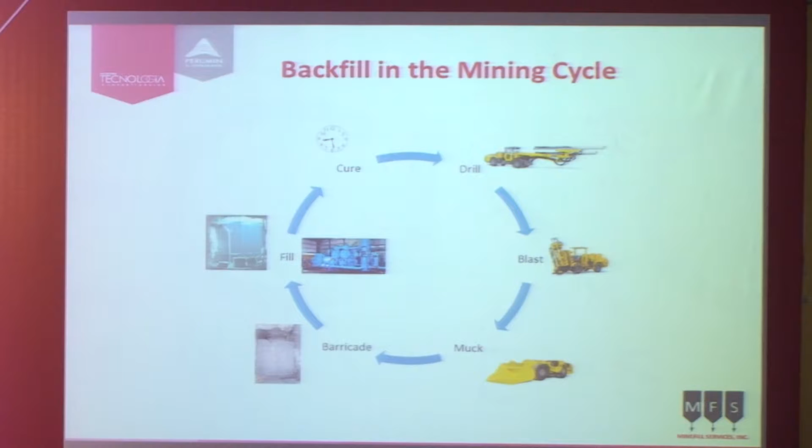So we talk about backfill in terms of the mining cycle. Everybody's familiar with the mining cycle where we drill, we blast, we muck out the material, and then we put some sort of fill in there in order to complete the cycle and allow us to go in for the next round of drilling.

Now in that cycle there's not a lot of flexibility with time, because the drilling, blasting and mucking is an operation that takes a period of time that doesn't have a lot of flexibility in terms of saving time. But when it comes to the backfill, it typically involves a period of rest while we wait for the backfill to cure, while you're waiting for the cement to cure. That cycle can take anywhere from a few days to a few weeks.

And at that stage, the mine is basically unproductive in terms of that stope - you have to go mine other stopes. So if there was a way of speeding up the fill cycle, it would allow the mine to increase its productivity and increase the throughput. I think that's one of the big advantages we see with this transition from hydraulic fills to paste fills - being able to shorten up the cycle time because we don't require the curing times with paste fills, and this leads to higher productivities in the mine.

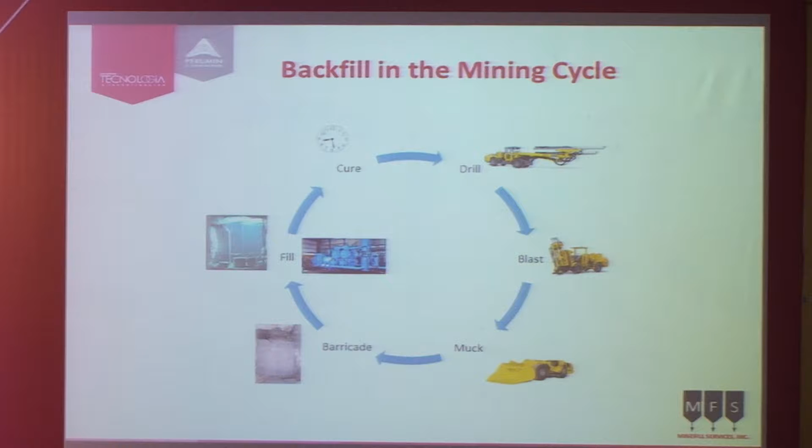So in terms of the backfill in use today, obviously here in Peru you're still dominantly based on hydraulic fills. There are a lot of very large hydraulic fill operations here in Peru - you can see my pictures there from the Centromin days up at Cobriza and Cerro de Pasco.

And slowly the industry is converting hydraulic fill operations into paste fills. Here in Peru you have about a dozen paste fill operations. But there's still a lot of mines that rely on rock fills, and the reason is because rock fill is able to achieve strengths that no other type of fill can achieve.

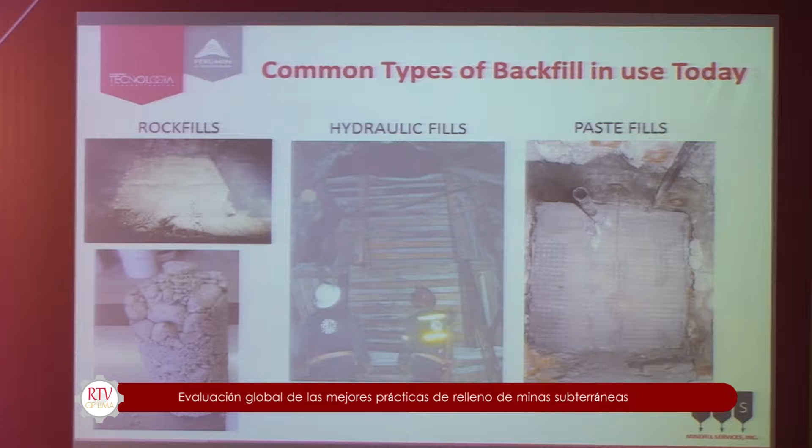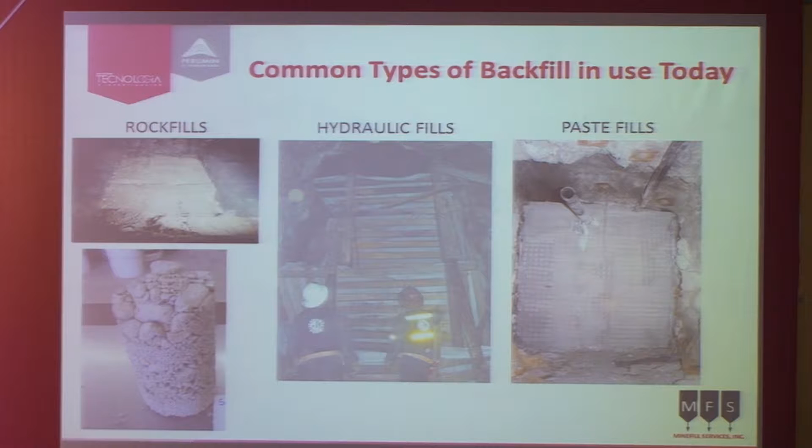So when you have a very high stress situation, particularly if you're doing mining undercuts, or if you're in very high stress ground, we still see a lot of operations that rely on rock fills. But the cemented rock fill worldwide is really a dying business, because there's probably been more cemented rock fill operations that have converted over to paste than there has been with hydraulic fill operations.

So if we look at the uses of backfill in terms of the industry drivers - in its simplest form, we use backfill just to fill the voids. Basically, we're returning mine waste underground, and in a lot of cases this is a complementary part of the mining cycle because we're providing a working floor in order to do the next lift of mining.

Obviously, the benefits to using the backfill as a void filler are benefits that you would easily see improve - being able to reduce the surface disturbance and returning more of the materials underground, having lower water treatment costs for treating water from tailings basins and the like, easier project permitting, which in a lot of jurisdictions now is really becoming quite an important factor, and of course reducing the closure costs and the liabilities long term at the end of the mine operation.

There are quite a few operations that look at doing a sulfide separation at the end of the flotation in order to selectively place high sulfur tailings underground and put the lower sulfide tailings on the surface, again in order to deal with the environmental impacts.

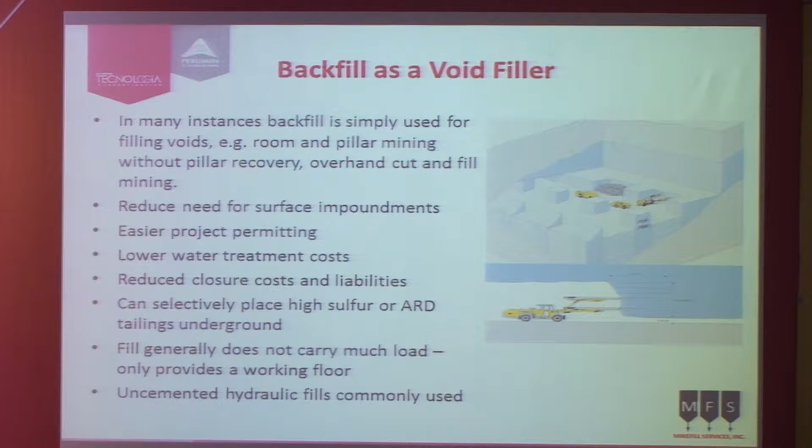But the real benefit of backfill, of course, comes from being able to use it for increasing the ore recovery. Basically, the backfill allows us to mine ore bodies that wouldn't be economically mineable otherwise, and we're able to get much higher extraction ratios, sending a lot more of the material to the mill by providing ground support during the mining.

Typically this is done in a kind of a primary secondary stoping sequence where you have large open stopes, long hole stopes, or a sub-level. In this case we have to add cement because the material is not self-supporting without cement. So cement consumption becomes an issue then.

In the secondary stopes, in a lot of cases you can get away with putting in uncemented fill, and in fact it's quite popular to put uncemented rock fill in secondaries, but cemented tailings in the primaries. But generally, unless we're a very large mine, we're looking at fairly moderate strength, something in the order of about a half an MPa compressive strength.

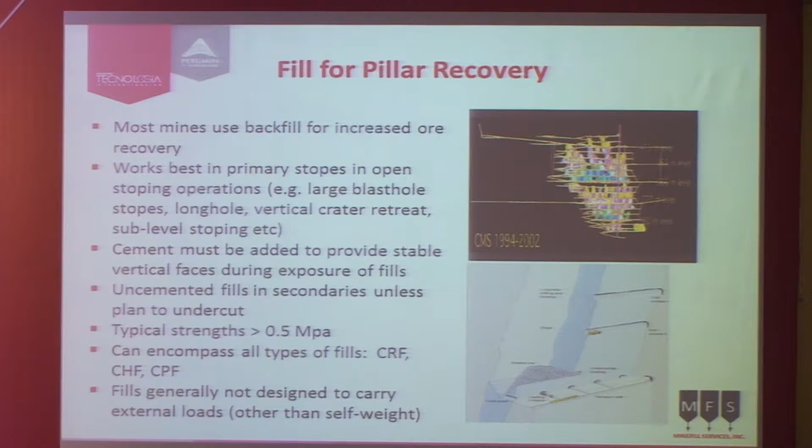This type of method, of course, is suitable for any type of fill, whether it be a rock fill, a hydraulic fill, or a paste fill. Because these fills are generally not designed to carry a load other than providing pillar support and being self-supporting. So if you're in a situation where you have a hanging wall putting a load on the backfill, that really goes to the next level of fills, which I'm going to talk about here - mining in a high stress ground where you have stress transfer to the backfill.

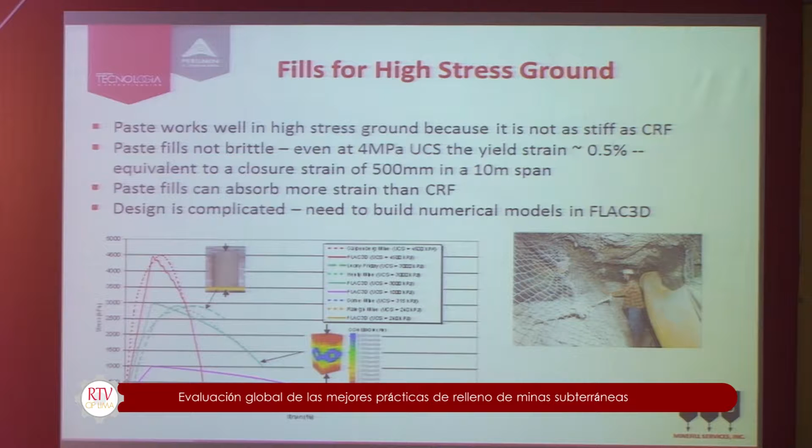In the case of high stress ground, traditionally mines have used cemented rock fill because it gives you a very stiff backfill at fairly reasonable cement contents, something in the order of 5% cement. But with the advent of paste fills, a lot of mines are finding that the paste actually provides more benefit than the rock fill. And that's because of the yield strains that are imposed in the fill.

The chart at the bottom gives you an excellent example, going from about a 250 kPa paste fill, where you have a very high yield to strain to failure, well over 3% strain. As you progressively add more cement, you increase the peak - you see the peaks rising with the different colors until you get up to the red where you have a 4 MPa fill. Now you have a very stiff paste fill, and you're looking at about a 0.5% yield strain to failure, but at a much higher compressive strength. So it's the ability of the paste fills to absorb these strains that makes it very suitable for use in high stress ground.

But I will caution you, the design process is very complicated. It's not something that you can do on the back of an envelope or in an Excel chart. It really needs proper numerical modeling.

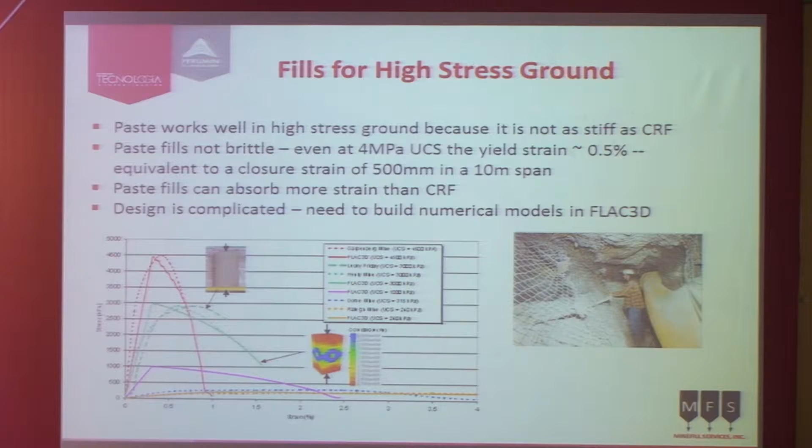So if I jump backwards here in terms of the history of backfilling - in Mexico, for example, we see lots of mines that show evidence of mine backfills that go back to the days of the Spanish conquest. And I'm sure you probably have mines here in Peru that have 100 years of operating history with backfills. In those days, of course, they didn't understand the science behind it. The only reason they did it was to allow them to provide a working floor in order to access the ore.

But in the 1950s, we started to see hydraulic fills becoming more and more common because of the comminution techniques that generated coarse tailings, and those coarse tailings could then be slurried and returned back into the mine as a slurry, which was very inexpensive.

With the introduction of Portland cement in the 1960s, we were able to start using cemented hydraulic fills, which allowed the recovery of pillars, as we just seen. However, the introduction of these cemented hydraulic fills did not come without problems, one of the biggest being the very high cost of the cement, because the cement consumption was high. Anyone who has worked with backfills knows that your cement cost can easily be 70% of the operating cost of your backfill.

The other problem, of course, is that when you're pumping a hydraulic fill, you end up with massive volumes of decant water, which is generally very dirty. It carries a lot of the slimes out with the decant water. And if you're in a region like South Africa, where mines are kilometers deep, pumping all that water down into the mine is a major cost, because they've got to get all that water back out again.

Then to make it worse, the metallurgists started playing with the grinds, making them finer and finer for the flotation circuits. So we find that we get less and less sand, and we're in a position where we have to accept more and more slimes in the hydraulic fill.

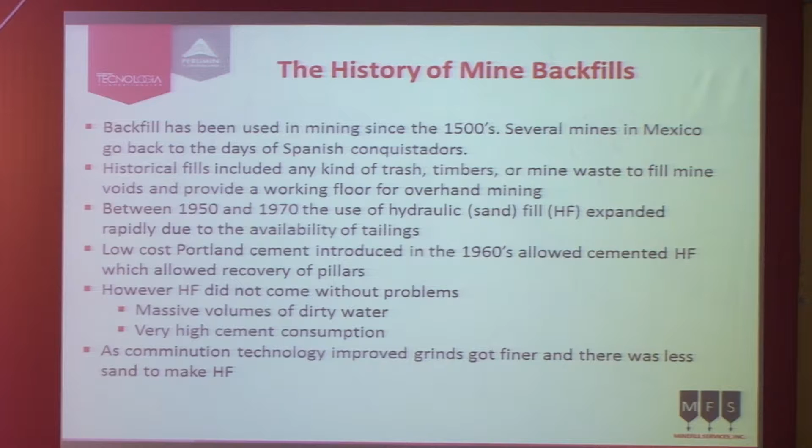So this really was the impetus for doing the research into the early days of paste backfills. It really was in Canada, through INCO, and in South Africa, where most of that effort was expended, and they were looking for ways to reduce the water that was being pumped down into the mine. That was the main focus back in those days.

One of the early solutions that came out was this so-called tail spinner, which is basically a centrifuge. The tail spinner basically produces a filter cake, and that filter cake was at a solid content that it could be pumped, or it could be pneumatically stowed in a stope, and you didn't have all that return water coming out then.

In 1978, the first tail spinner was granted a patent, and it was put into use in the Wits Basin in South Africa. Ironically, the first paste systems in Canada were actually based on the tail spinner technology, going all the way back to about 1983 at the Dome mine and at South Porcupine in Canada, where they had what we would call the very early beginnings of a paste system.

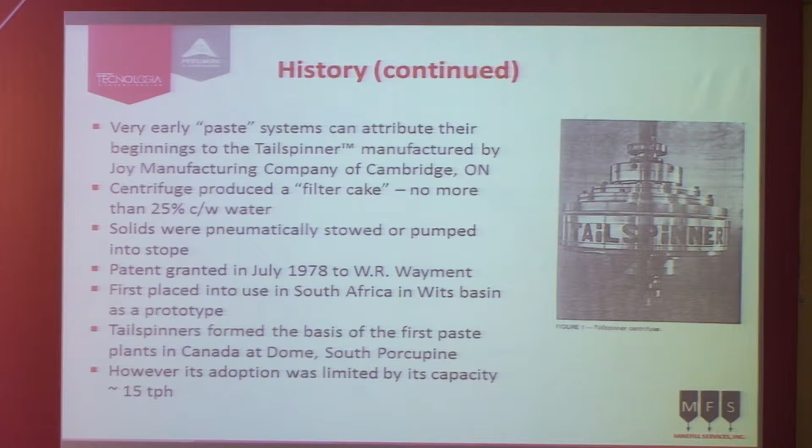The big limitation with this system, of course, was the throughput. You could only get 15 tons an hour out of this piece of equipment, so it didn't lend itself very well to the types of mines that we do today.

So with that work, we saw the beginnings of paste backfill in the early 1980s. And back in those days, I don't even think the word rheology was even known. Certainly people didn't understand the rheology, or appreciate how rheology impacted the behavior of these materials.

It wasn't until the late 1980s when a South African by the name of Verkerk actually started doing rheology experiments on thickened tailings, looking at transport of thickened tailings. He produced the first rheograms for thickened tailings and what we would call paste, and he was the first to publish a paper showing that these materials act as a non-Newtonian fluid, and that their properties are governed by the yield stresses and by the viscosity.

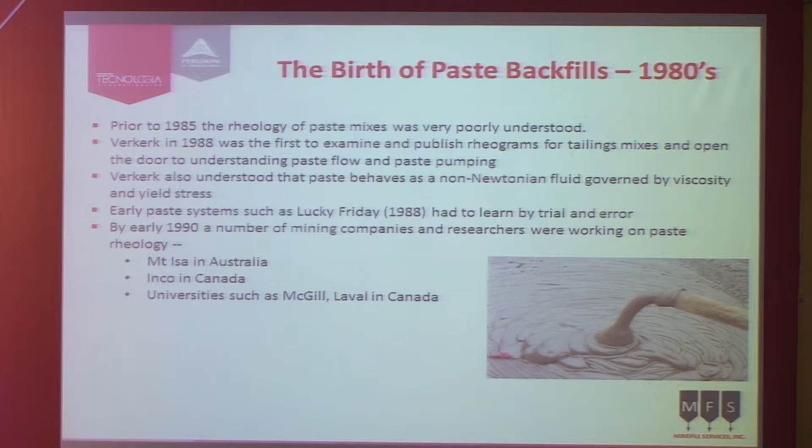That work was going on in South Africa, and at the same time we had some early paste systems going in the US, Lucky Friday, for example. But those systems were basically based on trial and error. There was no science involved, and they made a lot of mistakes and there were a lot of failures. So it wasn't until about the early 1990s that the mining companies got involved and started spending money on researching the properties of paste.

So what came out of that was that we began to realize that there was a science behind the rheology of paste.

If I start with the very basic definition, because it's amazing how many people don't understand the difference between a slurry, a thickened tailings, and a paste: the way we backfill engineers define it is that a slurry is a suspension of solids. Thickened tailings is equivalent to taking that suspension, pouring it into a beaker and letting all the solids settle, then draining the water off, and that material left in the bottom of the beaker would be called a thickened tailings.

But when you go to paste, you're actually doing some sort of mechanical action in order to remove more water, and at this point you start to get point-to-point contact between the particles in the paste, and that's why it behaves differently than a thickened tailings.

Everybody knows the industry definition of paste as being a non-segregating, non-settling material, and that definition still holds, but those of us in the backfill business would prefer that people understand the science, because our definitions are all based on science now as opposed to the industry rules of thumb.

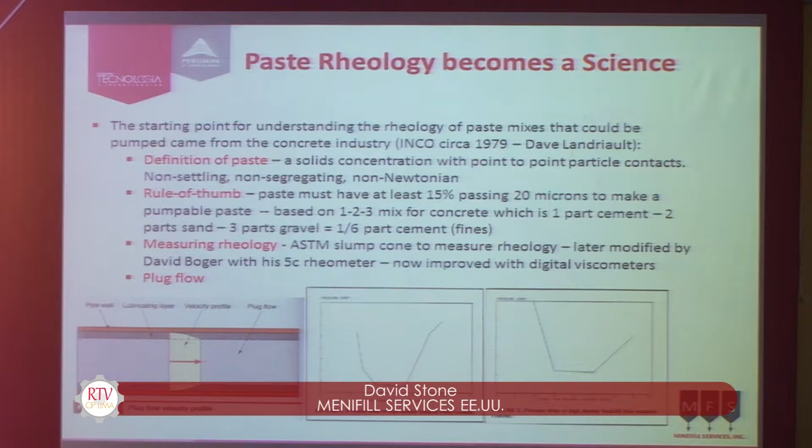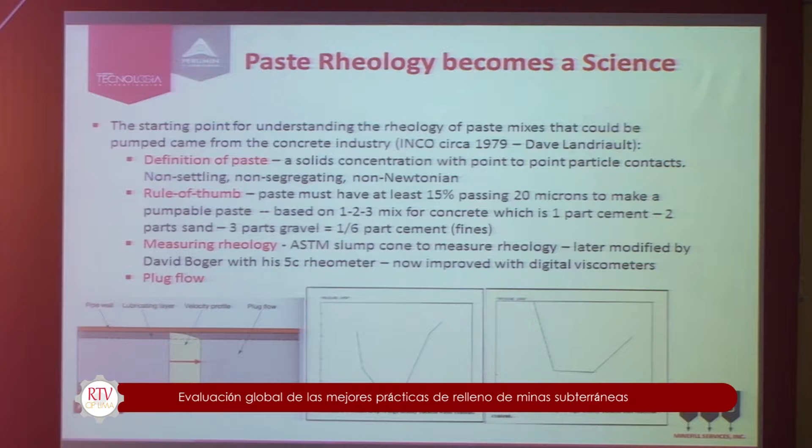What they realized is that when you pump paste, you get this plug flow phenomena, where you have shearing on the walls and the material in the core of the pipe acts as a plug. That plug flow resistance is driven by the fines in the paste, and it's driven by the water content, basically the yield stress in the paste.

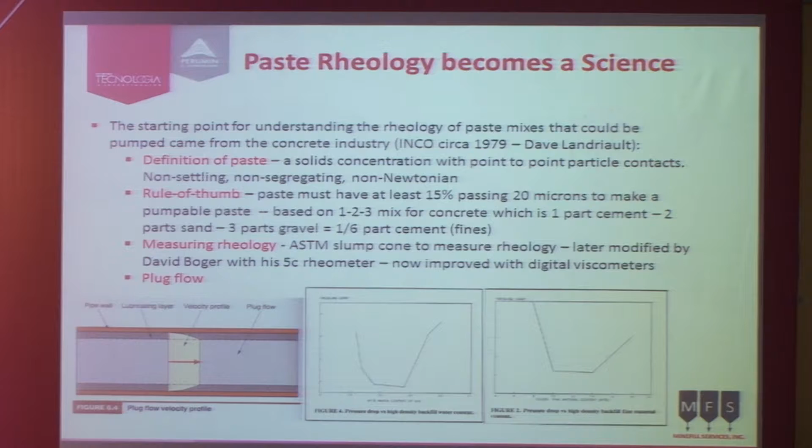The entire paste business is summarized on that one slide right there. So what we're showing here is the definitions, with percent solids along the x-axis and yield stress along the y-axis. This is a typical paste rheogram.

Here we transition from a slurry to a thickened tailings to a paste and then eventually to a filter cake. The transition from slurry to thickened tailings takes place at about a 20 Pascal yield stress, and the transition from thickened slurry to paste takes place at about a 100 Pascal yield stress, and then by the time you get up to about 800 Pascal yield stress, now you're talking about filter cake.

Now these are not solid black lines, they're very thick gray lines. Depending on the material and the mineralogy and chemistry of your tailings, these points move around.

But what this slide also shows you is the various methods of producing these materials. So you go from a segregating to a non-segregating material using unthickened, moving into a conventional thickener, moving into a high-density thickener, and what we would call a paste thickener.

In terms of the thickening continuum, what the curve shows is that as you go up the curve, you have increasing residence time in the thickener, and that means the thickener has to have an increasing volume.

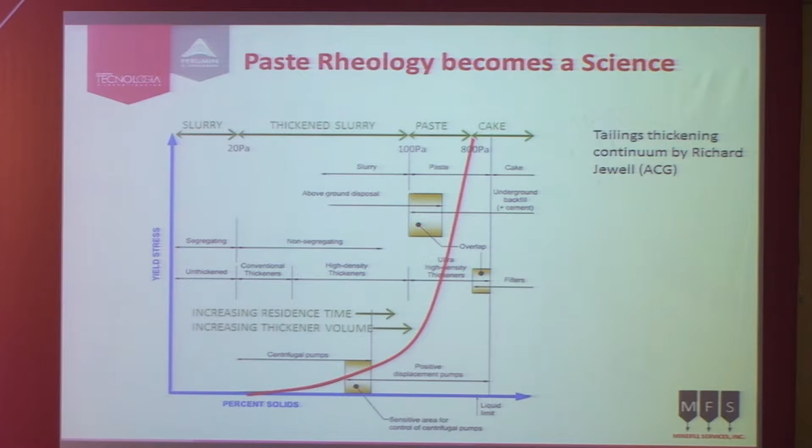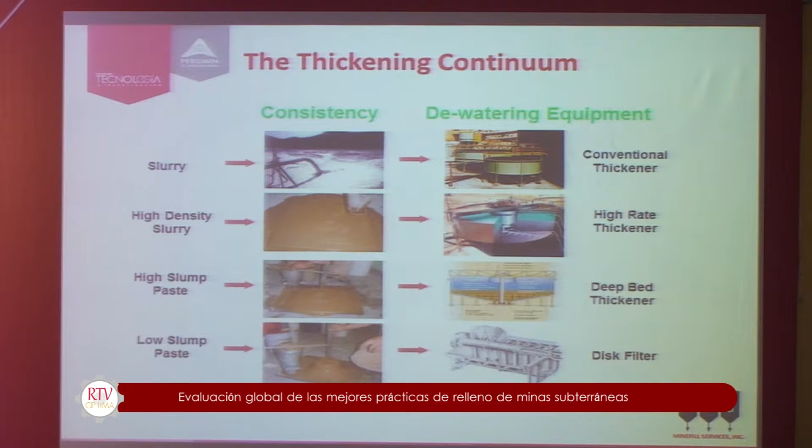So just from a visual aspect, that thickening continuum goes from the slurry, which is just based on conventional thickening, and it might be at 40 to 50% solids. You get into the high density slurry, where now you're looking at something in the order of 60 to 65% slurry solids using a high rate thickener.

Then you get into what we call the high slump paste, where now you have to start looking at a larger thickener, typically nowadays a deep cone or a deep bed. Now you're looking at something north of 70% solids, and then you get up into the low slump paste, something in the order of a 7-inch slump paste. Now you have to go to filtration to get the solids content, because you can't produce the material from a thickener, since you're talking about solids contents in excess of 75%.

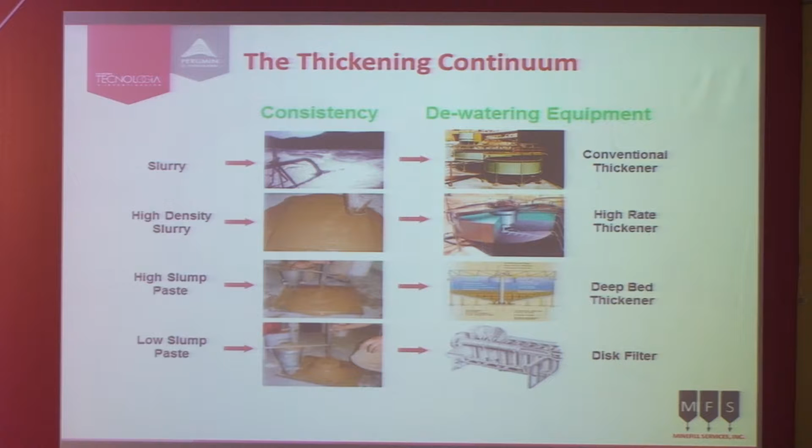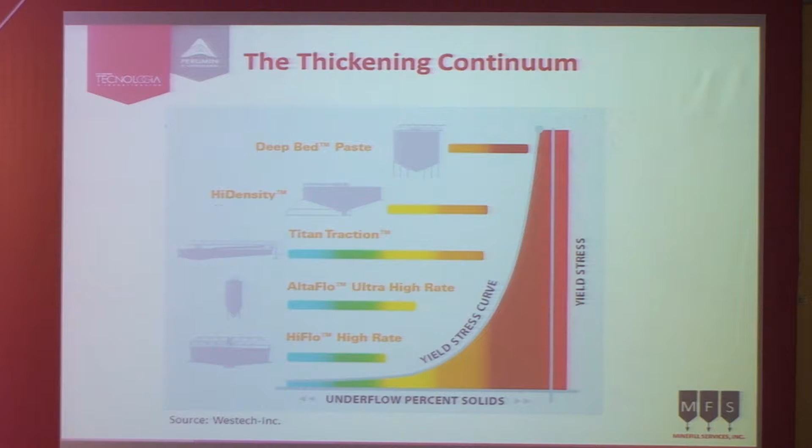This slide, I apologize, is a commercial slide produced by Westech, just showing their particular line of thickeners, but I wanted to show you how, as you go up that yield stress curve, it drives the decision as to what kind of thickener you're going to use. At the low end, you're using a conventional thickener, and to produce the very high solids content, very high yield stress materials, you're going to have to look at a deep cone or a deep bed thickener.

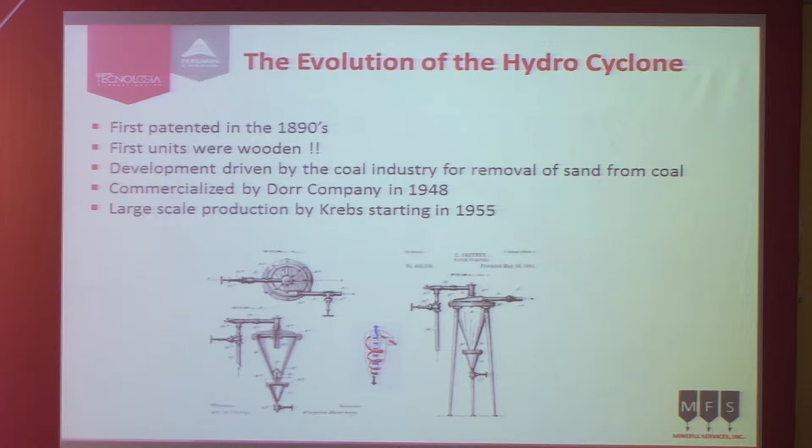I just want to spend a few minutes looking at all the different types of equipment that would be in a backfill plant, and show you how the industry has put pressure on manufacturers to deliver products more suited to what the backfill business needs.

One of the most fundamental pieces of equipment is the hydrocyclone, which even in your hydraulic fill plants would see wide use. This equipment's been around for well over 100 years, 125 years. First patented in the late 1800s, they were built out of wood, and served the coal industry by taking contaminants out of the coal.

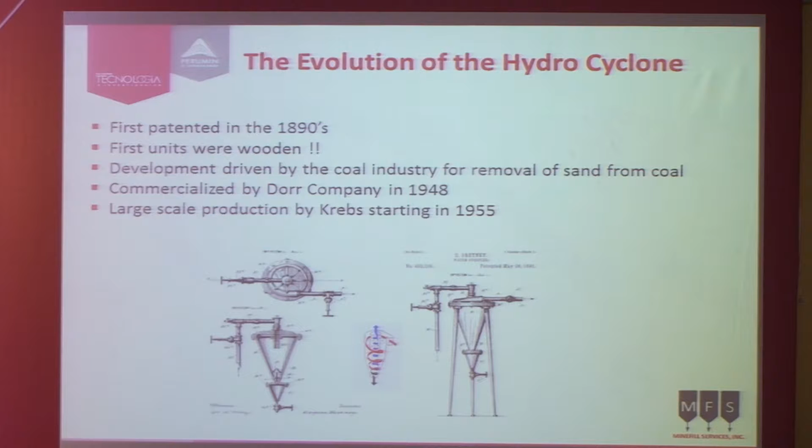In the late 1940s, early 1950s, these units were commercialized for metal mining and dealing with metal tailings by the Dorr Company. Then in 1955, Krebs was formed, and Krebs is still today one of the larger manufacturers of hydrocyclones. But the basic concept behind the operation of a hydrocyclone hasn't changed at all. What's changed is the materials they're built out of, and the control technology to control the stream of material that reports to the underflow and overflow. But the actual concept is virtually the same.

The thickener plays a very important role in the business. These units are over 100 years old, dating back to the early 1900s, where the first designs used rakes in a circular tank. Then in the 1990s, Alcoa started looking at treating bauxite residues for alumina plants.

They produced paste thickeners, or at least thickeners that could produce a paste for bauxite residues, because this material is extremely hard to dewater. In the late 1990s, it was realized that technology was very well adaptable to the mineral industry, and we started seeing metal mines getting into it. The technology was licensed to Alcan, who sold those thickeners through the EIMCO company to non-alumina industries.

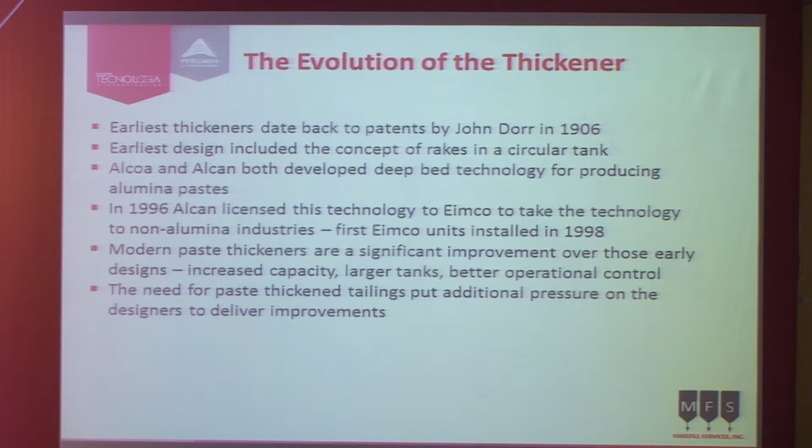The first units went in in 1998. Even today, modern paste thickeners still rely on that same technology, although there's been a lot of evolution in those thickeners, which I'll talk about in a few minutes. Really, the paste industry put a lot of pressure on manufacturers to come up with improvements.

What we see now is that newer thickeners have much better rake designs and can handle much higher torques. There's been a lot of engineering that's gone into the shape of the beds, looking at the angles of the beds and the volume in the bed.

One of the big improvements has been putting in the dewatering pickets, because the problem with paste is you pour the material in the top, and you're supposed to squeeze the water out so you get the thickened product out the bottom. But that flow path to get the water out is very long. By putting in these dewatering pickets, they shorten the flow path, which speeds up the thickening process.

There's been a lot of work done on flocculant chemistry, and today there are well over 300 of these deep cone units in operation, both for surface paste disposal and underground paste disposal, at over 100 mine sites. For a lot of mines, the core of the plant is a deep cone thickener.

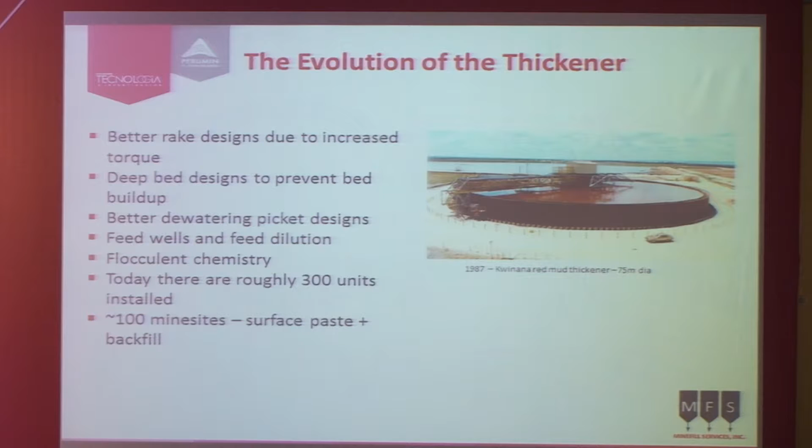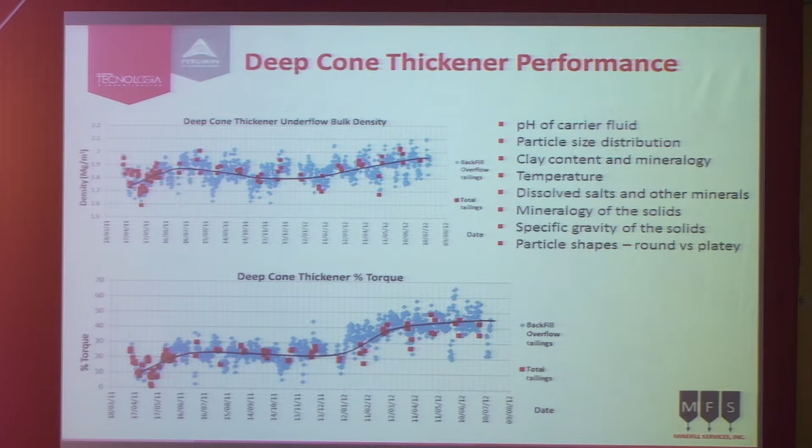The reason you get this is because of changes in the mineralogy of the material going in, changes in the particle size, changes in the clay content. If you have any dissolved salts or other dissolved minerals, it can have a huge influence on the thickening process. And as you're moving through the mine, you're changing sulfide content, oxidation, all kinds of changes in the ore mineralogy over time that will produce this cyclical behavior.

In the bottom slide, you see a change in the ore. You see it's cycling up and down, and then all of a sudden you get into a material that maybe had more sulfides in it with higher SG material, and all of a sudden the torque on the rake increases dramatically in a very short period of time. You'll see this process going on over time.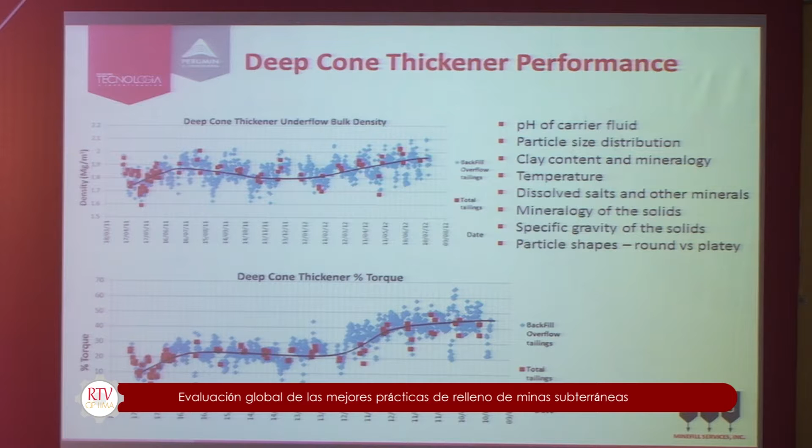So for the backfill business, we don't like this, because we tend to have very tight operating parameters that we use for the paste per mine backfills. We want to control the percent solids to within about 0.5%, so we don't like these fluctuations.

So most paste plants for underground disposal would still have a filter cake component that gets added into it in order to level this out, in order to kind of mask that behavior.

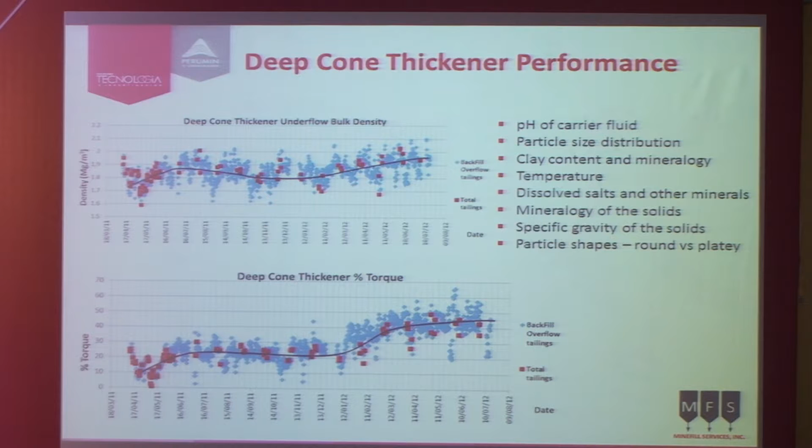But still, you can thicken the tailings cheaply and quickly by doing a pre-treat with the deep cone. Of course, the other thing that happens with a deep cone that a lot of people don't appreciate is that after the material comes out the underflow, it then goes through a pump, and you get a pretty significant shear thinning when it goes through that pump.

So you can see the blue dots are the yield stress of the paste before it went into the pump, and the red dots are the yield stress of the material after it goes through the pump. This is real live data. It goes from something in the order of 120 Pascal yield stress before the pump down to about 40 to 60 Pascal. So it's halving the yield stress by going through that pump because of the shear thinning.

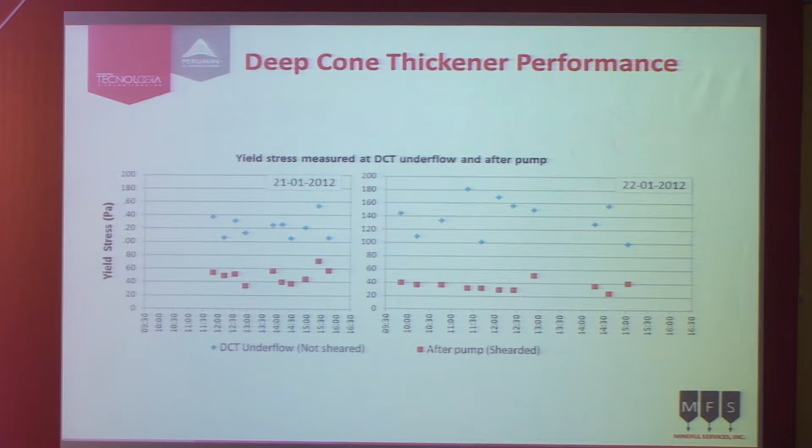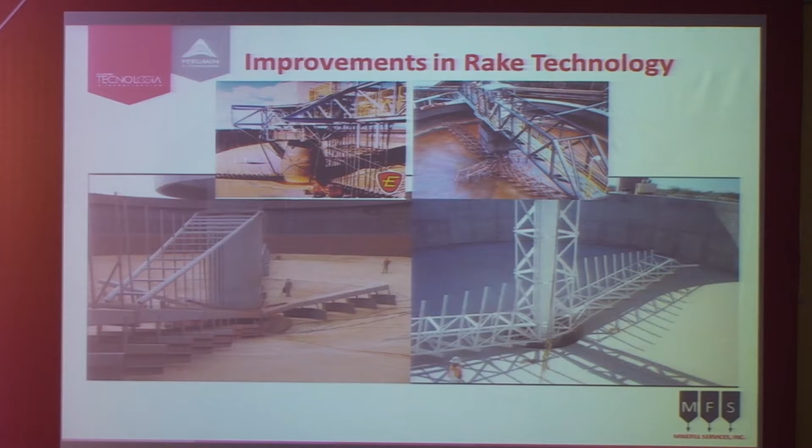So the last aspect of the plant then, of course, is the filtration. And again, not surprising, the filtration technology has been around for a very long time, well over 100 years. And as with the hydrocyclone, there really hasn't been any significant technology improvements in the filtration for tailings.

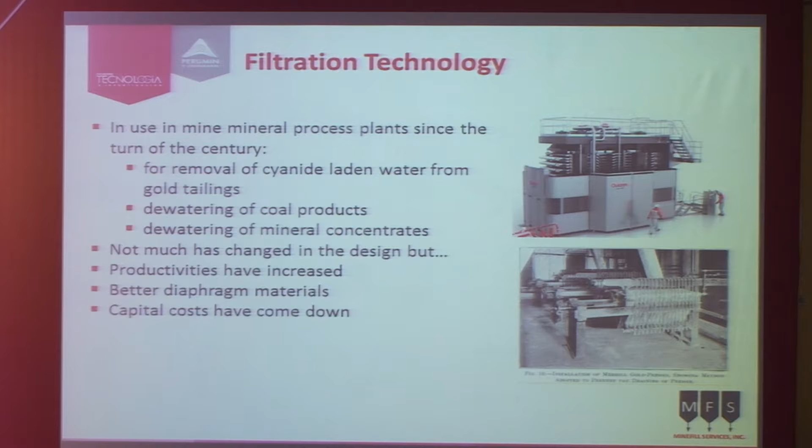But what has changed is the cost. What used to be - I can remember when I first started out in this business - a Larox filter press was something in the order of $2.5 million, and it cost 75 cents a ton to operate. Nowadays, these units sell for a fraction of that value, and they operate at much higher efficiencies, so they produce thickened, filtered tailings at a much lower cost. So all of that is good for the industry.

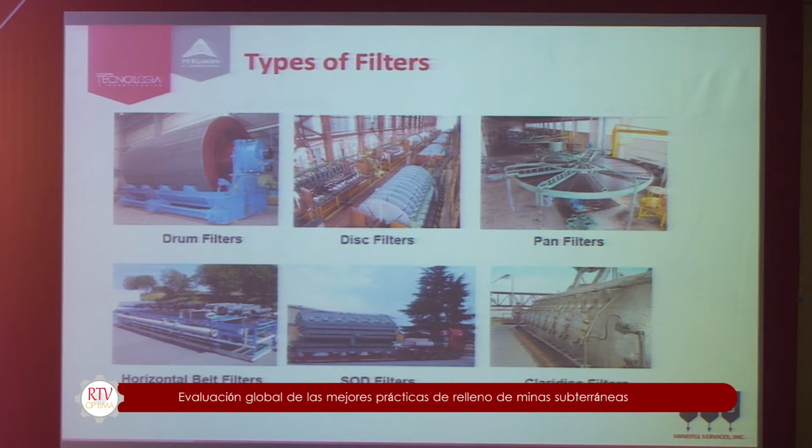So there's a number of different varieties of filters available for thickening tailings. The ones we generally rely on - probably 90% of paste plants would have disc filters, and the remainder would have horizontal belt filters. The horizontal belt filters do have an advantage in that you have a longer retention time, and you can produce a thicker cake, and they have a much higher throughput, requiring less maintenance than the disc filters.

But for some reason the reason people like disc filters is because they're compact. They take up a lot less space in the plant, whereas a belt filter takes up an immense amount of space and makes for a very large plant.

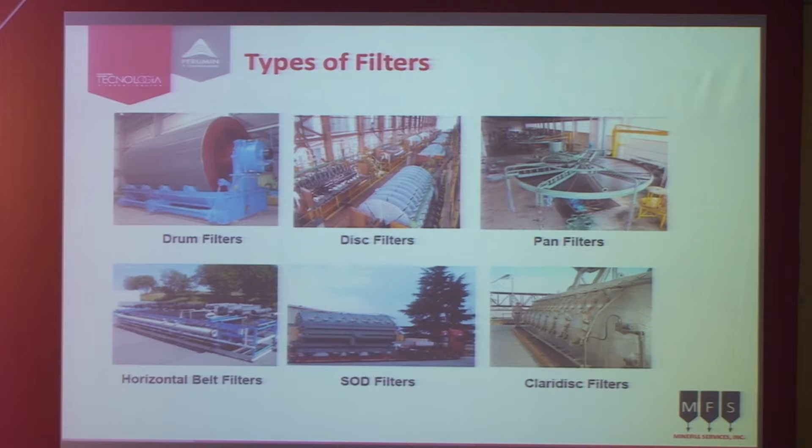So once we've made our paste, now we've got to get it into the mine. I talked earlier about the work that Verkerk was doing in South Africa, trying to assimilate pumping of paste to the pumping of concrete, for example. Now, concrete's got aggregate in it, so it's not surprising that some of the very early paste systems had aggregate in them. Actually here in Peru, at Andaychagua, you have kind of an aggregate-based paste system, and people were adding the aggregate because they were essentially trying to make concrete.

And Verkerk was one of the first to notice the conundrum that if you add aggregate to thickened tailings to make a paste, it actually lowers the resistance in the pipeline. So in these very early systems, a lot of them added the aggregate in order to lower the pressures in the pipeline because they weren't capable of pumping it otherwise. Even the Lucky Friday, the early startup of the Lucky Friday system in the US had aggregate in it. The very early Boliden systems in Sweden, at Garpenberg and the like, all had aggregate, and all the very early systems in South Africa had aggregate.

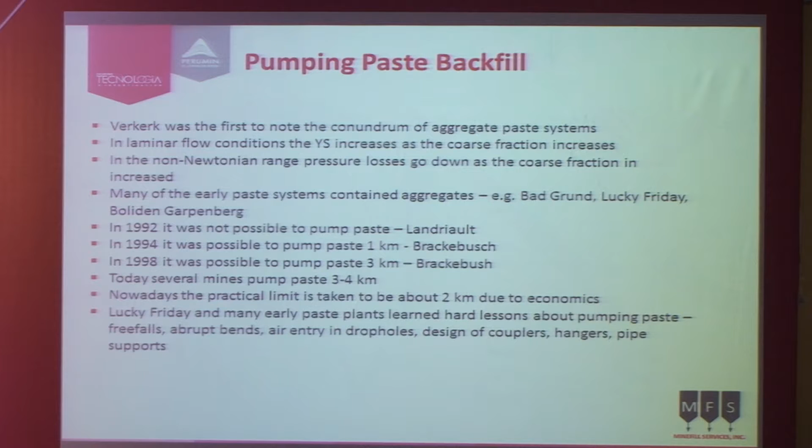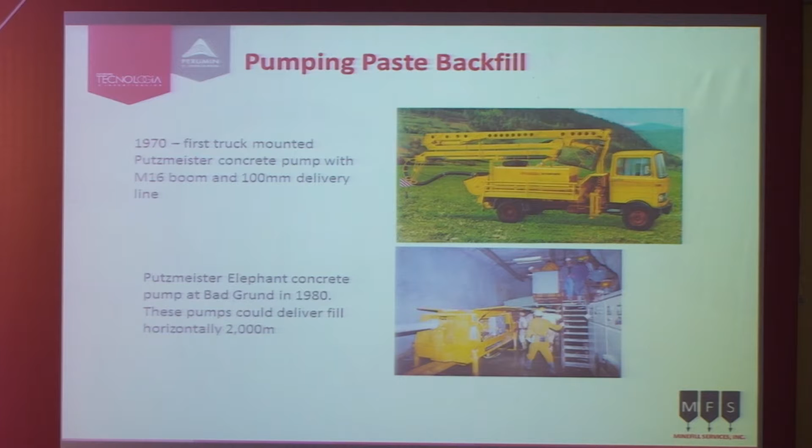So in 1970, there you see a Putzmeister concrete pump truck with a 100mm delivery line. Then by 1980, Putzmeister was supplying pumps to the Bad Grund mine in Germany, which a lot of people talk of as being the very first paste system installed in the world. Now, Bad Grund also had aggregate in their paste.

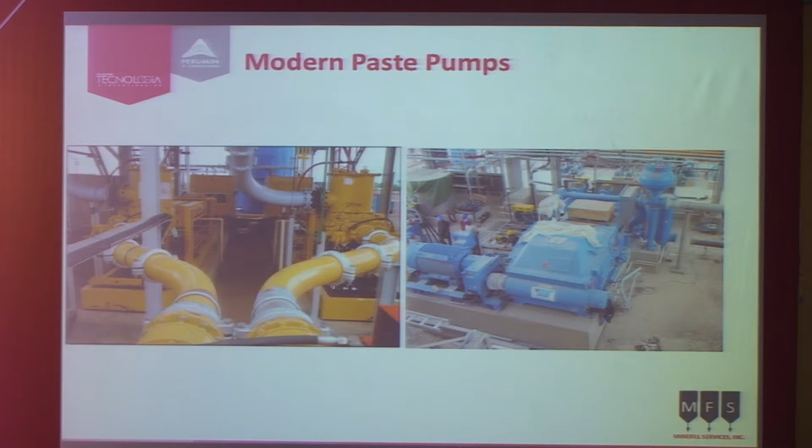And then on the right side you see a Wirth pump, which is a piston diaphragm pump. These pumps are massive - you can see the size of the people standing in the room. That pump would fill this whole room and plus more. They're monstrous pumps, but they will pump 1,000 cubic meters an hour and at pressures of 20 MPa.

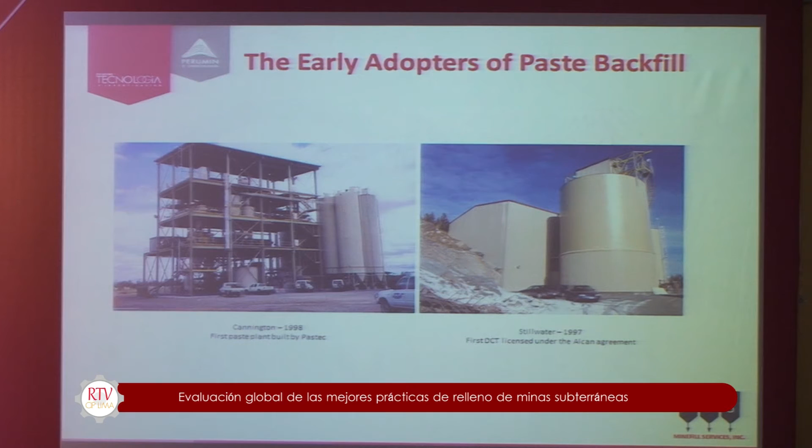So the early adopters of paste - the first Golder Pastec plant that went in was 1998 at Cannington in Australia, and ironically this was the second paste installation that went to Australia. The first one, done in the 1980s, didn't work, and that plant was a failure.

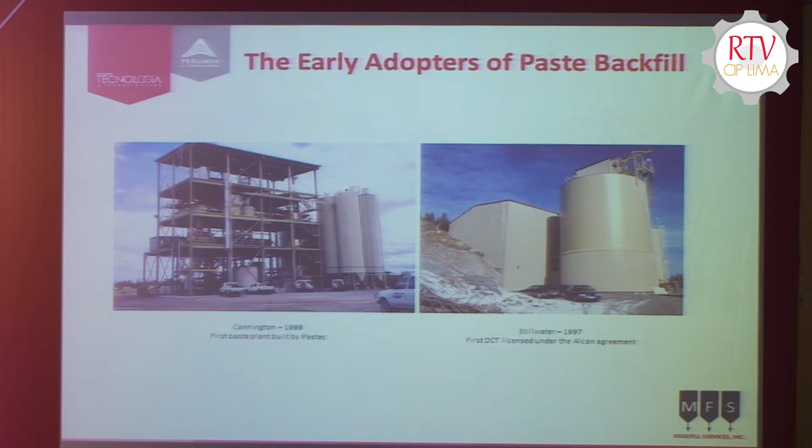You see there the 1997 Stillwater, which was the very first Alcan deep cone paste thickener that was installed under the Alcan licensing agreement in the US.

You can see the bauxite residue plants in Jamaica. Ewarton was the very first Alcan - the very first Alcan one that was put in, about 1996, I believe. And then you see Pajingo Gold in Australia in 2000, which is an Outotec design.

So all the big thickener manufacturers all make deep cone or deep bed thickeners, whichever you want to call them. They all have their own variety.

So as it stands now, we have about 150 paste plants operating worldwide. At least a dozen of those plants are here in Peru, and the industry adds about 5 new plants a year.

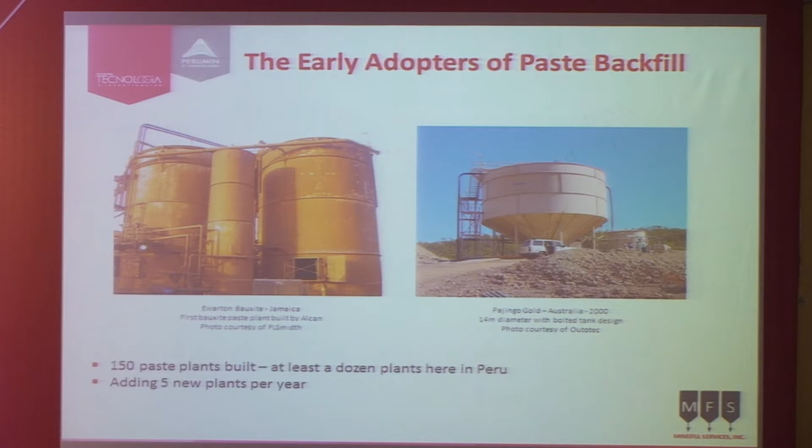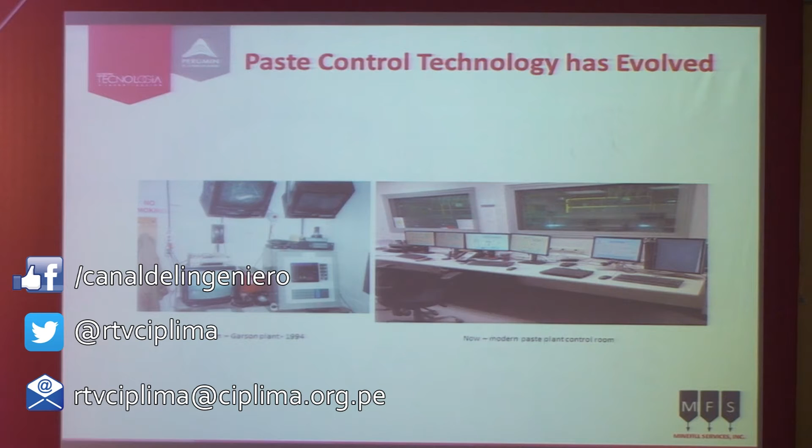So the operation of these plants, obviously the control technologies are a lot more sophisticated. You can see the Garson plant in 1994 on the left there, which was just a small, probably an amber monitor hooked up to an XT computer, and then a modern paste plant which has multiple screens and an HMI system. Everything is all regulated and controlled just like any normal metallurgical plant, a lot more sophisticated.

And of course all these plants now have fiber technology for being able to have cameras to have a live feed, so you can actually view the paste going into the stope.

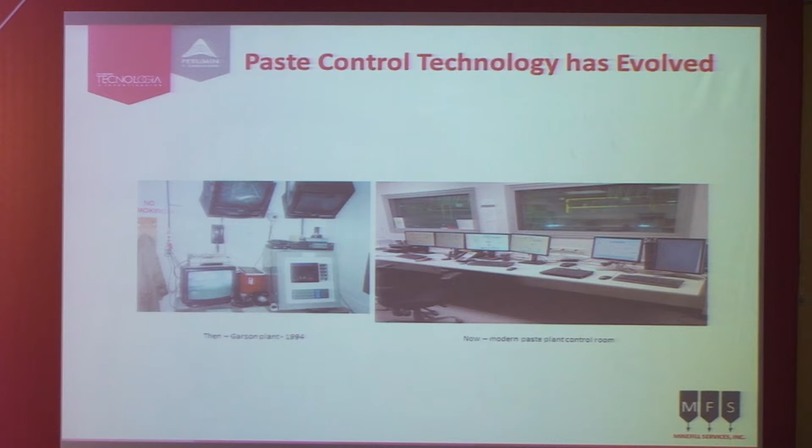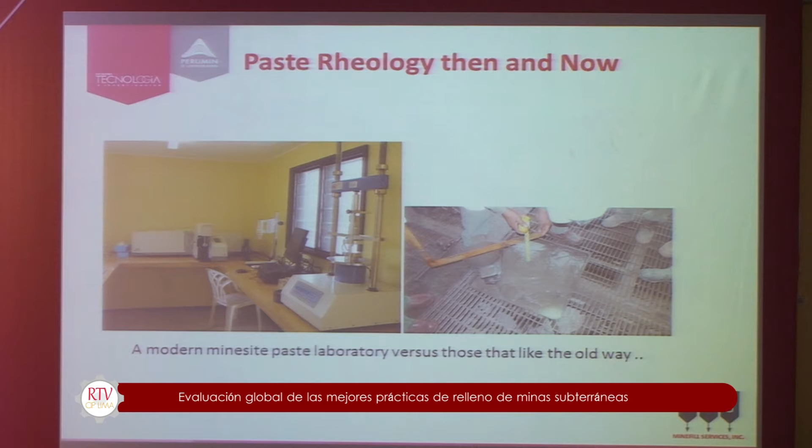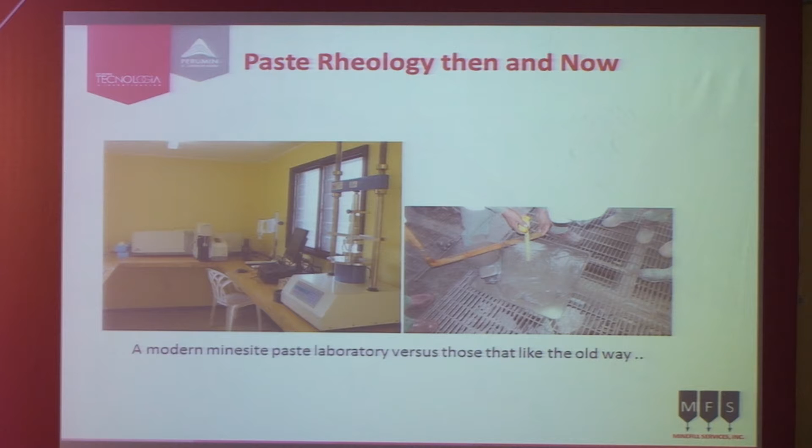Of course the actual quality control process has evolved over time. It's amazing how many mines still prefer to rely on the traditional ASTM slump cone, whereas other mines are adopting the rheometer. You can see the rheometer in the foreground on the left, and in the background you can see a laser particle sizer, used for routine quality control.

This slide was from a presentation I gave last year, showing how the paste business has been adopted over the years. You can see the two main symposia: the Minefill Symposium, an international conference held every three years, and the Paste Symposium, an annual conference. This coming year it will be in Santiago; last year it was in Australia. You can see how many papers are published referencing paste.

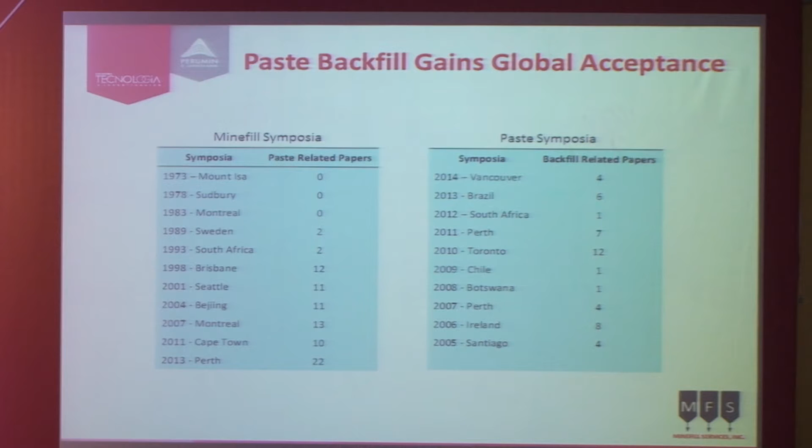Prior to 1989, in the Minefill Conference there was virtually no mention of paste. Then you can see how the number of paste papers has exploded over the years, up to 2013. The same is true for the Paste Symposia - as time goes on, we see more and more papers coming in. It's a measure of how the paste backfill business is being accepted as a global standard now.

So we've talked about the roles for backfill: using it as a void filler, providing a working floor for overhand mining, and very importantly, providing us with resource extraction by being able to recover pillars and recover broad disseminated ore bodies that might otherwise not be able to be recovered.

And of course the backfill business brings with it improvements in ground control, particularly in rock burst prone ground, by improving safety in the mine, and decreasing subsidence. Here in Peru, you get some very specific benefits in terms of being able to return mine waste underground and mitigate surface environmental impacts by disposal of highly acidic and highly toxic tailings.

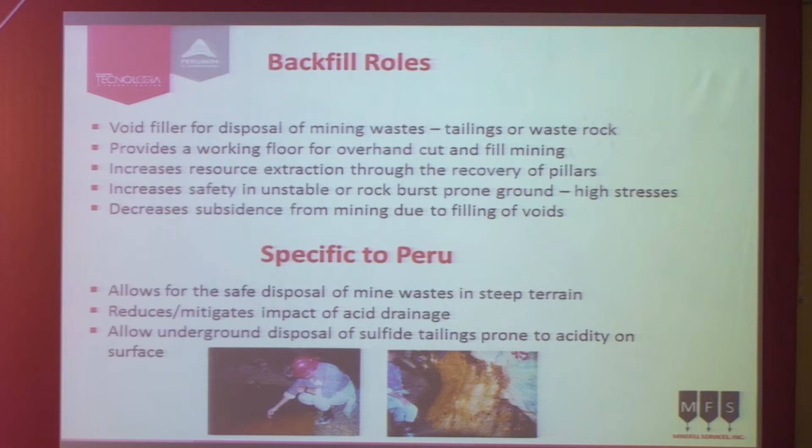But it's unfortunate that as the industry marches on, we have events that change the whole industry. This Mount Polley tailings incident in Canada - I know it's an open pit mine and may not be particularly relevant to mine backfilling - but it's relevant to how it's going to drive the industry, because it will help determine the future of mine backfilling. Imperial Metals, a Canadian company with 5 operating mines and about a $2 billion market cap, owns Mount Polley, a copper gold mine in north central British Columbia.

They're mining about 0.3 copper, 0.3 gold, fairly typical for a porphyry copper deposit. They had this incident in August last year where the tailings dam was breached, releasing 10 million cubic meters of water and about 4.5 million cubic meters of tailings slurry, completely inundating the creek downstream and Polley Lake, with impacts felt all the way down to Quesnel Lake. Fortunately, there were never any heavy metals recorded in any of the discharge water - it was rather ironic that all of the water quality tested returned drinking water standard, even after the incident.

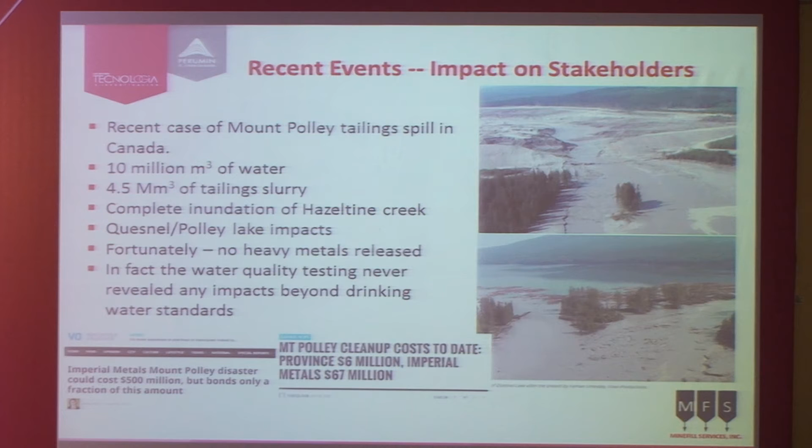But when we have incidents like this, it's almost like the hand gets forced at some point, because you have to consider the downstream impacts of these types of events. So the future really is going to come into having a consideration that links both the surface disposal to the underground disposal.

So what happened after Mount Polley was that there was a huge outcry as to how is it that a reputable mining company in a very well-established jurisdiction with a very rigorous permitting and regulatory process, and they've got highly qualified mines inspectors and annual inspections and all that, like, how could the thing fail?

Of course, the people that were against it immediately said, well, what that means is that it's impossible to build a tailings dam that will not fail, because if this one has failed, every tailings dam is going to fail. So there was an immediate backlash in Canada against the mining industry as a whole, but in particular against the disposal of surface tailings.

And the next thing that happened, of course, was that the First Nations groups decided that they wanted to be part of the permitting process, and they wanted to have a say in all new mine permits. And then, of course, Alaska got very upset because the project was very close to Alaska.

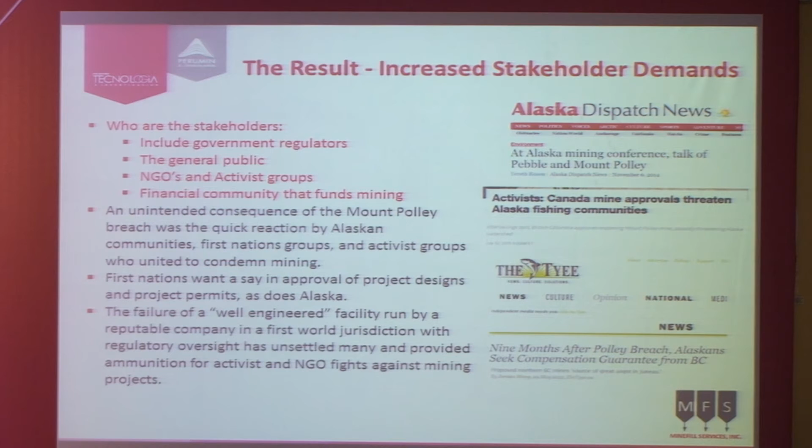So what that means for the mine backfill business is that we've got to put the tailings back underground. There's going to be increasing pressure to put tailings back underground. And the future of the industry is going to be that the stakeholders will no longer allow the practices of the past, and they're going to want minimal surface disturbance with minimal impact, minimal disposal on the surface.

The regulators are going to push to outlaw the wet tailings, and the mining companies are going to be forced to come up with technologies that meet these demands. And you're going to see a lot of pressure on the surface disposal that will have impacts on the underground disposal.

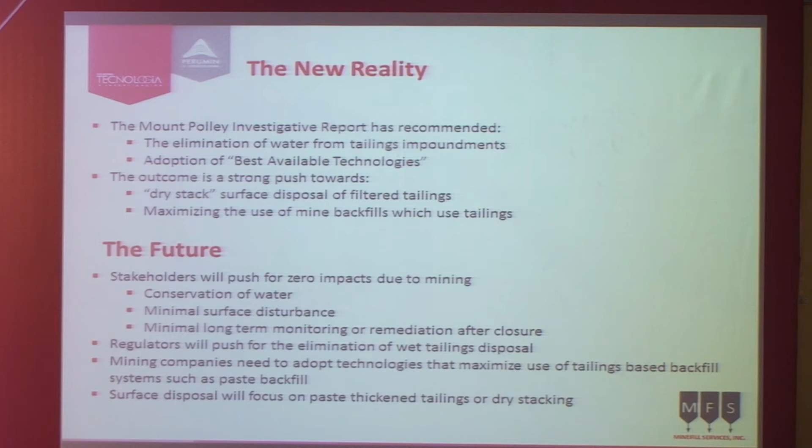So what's ironic about the Mount Polley incident was that they focused on dry stacking. When in reality, dry stacking, as I said, is not the solution for every mine. But they never made any mention of paste thickened tailings.

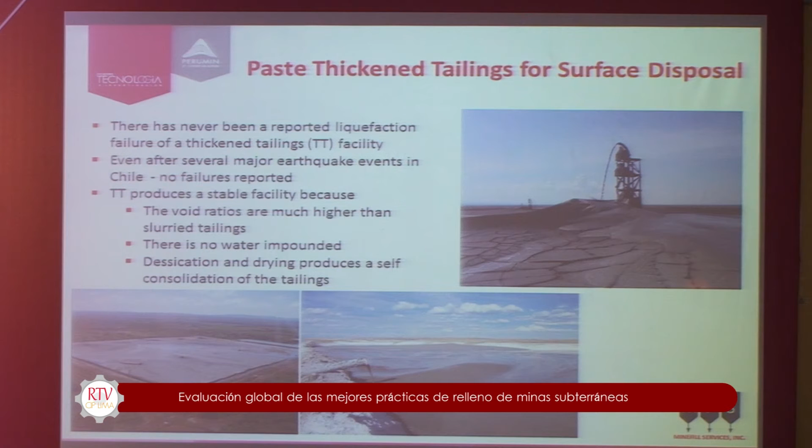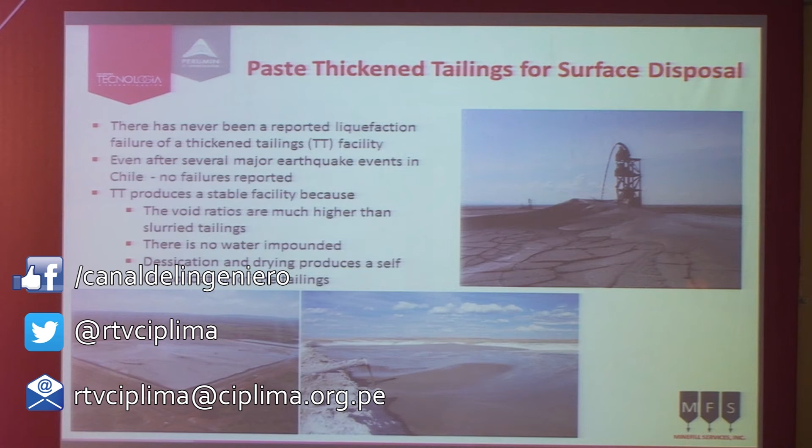And a couple of years ago, at the Paste conference in Australia, Andy Fourie from Curtin University got up and said that out of 130 some odd thickened tailings facilities that have been built worldwide, there's never been a failure. And he even noted that the massive earthquake that happened a couple of years ago in Chile, there were over a dozen very large tailings facilities that received some fairly massive shaking, and none of them failed.

And the reason that we don't have the failures in the thickened tailings facilities is because the void ratios are so much higher. And when you combine that with the evaporation processes, which cause kind of a self-consolidation of the material as it's being placed, you take the material down that critical state line to the point where it can't liquefy anymore.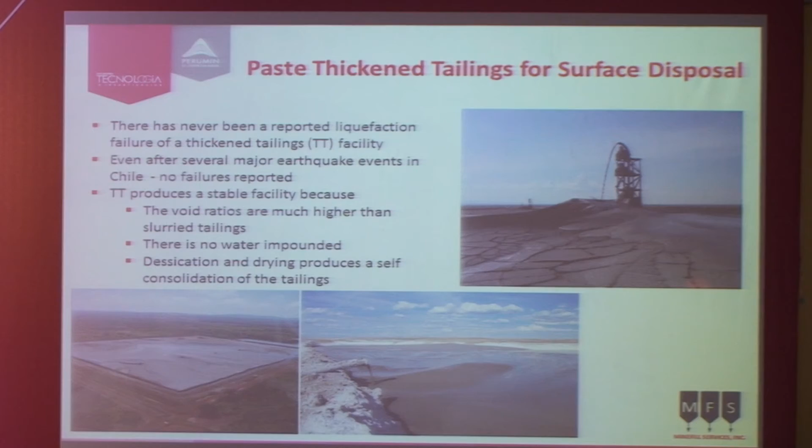So again, I realize that this is not mine backfill, but the point of my discussion here is that we have to marry the surface solution with the underground solution. And paste thickened tailings is a perfect brother to paste disposal for underground. And more we're starting to see dry stacking being combined with paste.

Milpo at Cerro Lindo, as all of you know, do dry stacking, and they also have two paste plants that operate there. And the reason is because we're using the same technology for the thickening and the filtration, and it's just a matter of this material goes this way, that material goes that way.

What doesn't work for these facilities is if you have to separate the tailings. So for example, using dry stack with hydraulic fill, I'm sure some of you have come across this suggestion, where we do hydraulic fill, but we're going to take the material that we can't put underground, we're going to take that material, we're going to dry stack it. Well, unfortunately it doesn't work, or at least if it does work, it's very expensive, because the problem is that you're trying to filter the fines, and filtration of fines is a very expensive and very tedious process.

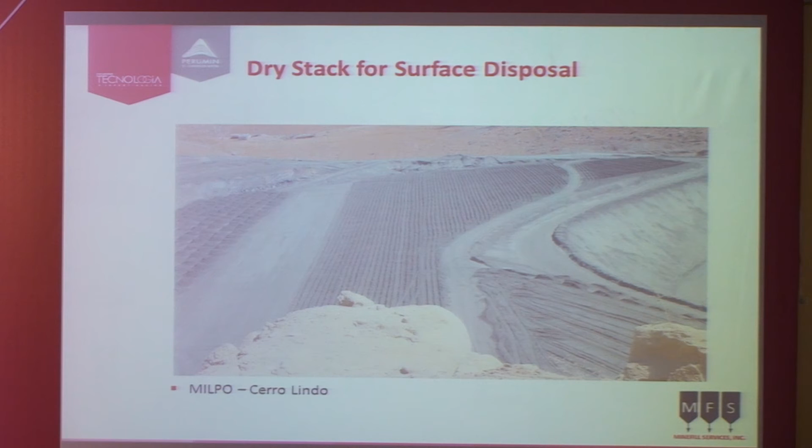It requires a massive filtration plant, and it's very expensive to operate. So it's not a very clean solution, but if you go to the total tailings solution, the two solutions marry together.

So I'm just going to very quickly run through a couple of other best practices while I wrap up here. In Australia, there's a lot of focus now on farming of existing tailings for use in paste backfill. So what they're doing there is they've got an operating history with tailings sitting on the surface. Fortunately there, the material is drying and desiccating in this pond, so it's already dewatered, and they're able to mine this material and basically feed it into an aggregate plant.

And all it consists of is a shredder to break up all the lumps in the tailings and take all the organics out. You put it in a mixer, add water and cement, you've got paste, off it goes. And there you see 3 operating farm tailings plants that are in operation in Australia right now. Very simple plants. You can build these plants for under $10 million compared to $50 to $80 million for their equivalent if it was a full paste plant.

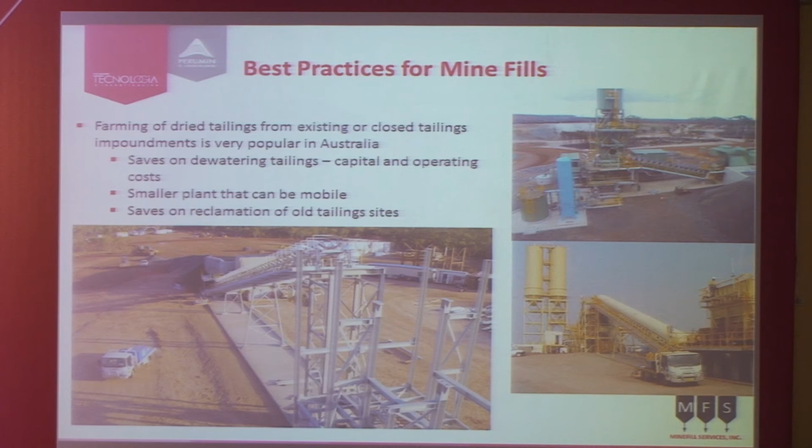Of course, a lot of the best practices for mine fills, when we talk about the safety aspects, really come down to the barricades. Because in terms of failures in mine backfill systems, we have more failures related to barricades than any other type of incident. So barricades obviously apply to hydraulic fills and paste fills, where we have to contain a liquid for a period of time. But it's a very complicated design because the loading on the barricade is time dependent, and the material is changing properties over time because it's curing. As that cement cures, the material stiffens, and it's tying up the water in the backfill. So the selection of the barricade becomes very, very important.

In the case of hydraulic fills, we're looking at a short-term solution, because once that material is drained, it basically becomes inert. And in the long term, you're looking at providing long-term drainage in order to make sure that you don't have any hydrostatic pressure on the barricade.

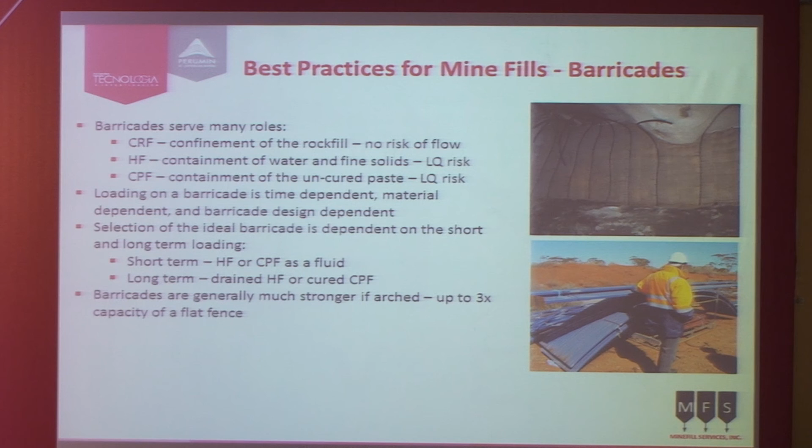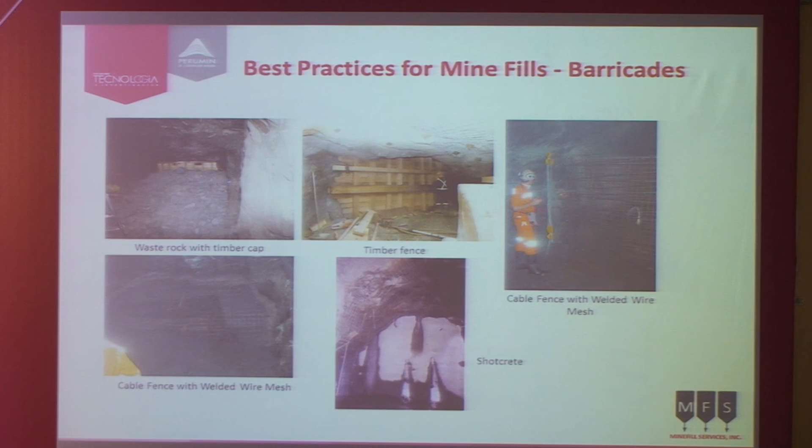There's a lot of different choices for barricades, and some of these pictures are actually from here in Peru. But when it comes to paste, people seem to prefer shotcrete or waste rock barriers. These cable fences, that's actually in Brazil, at Anglo Gold in Brazil. It's a very nice solution as well. And then of course timber fencing, very popular here in Peru.

So the reality with paste is that people may not believe it, but liquefaction is a real risk with paste, and there have been a lot of failures with liquefaction in paste. The risk is really just for the first 24 hours when you get that initial curing. But you can see some of the incidents, one barricade failed because it had a plugged vent line, and so overpressured the barricade. There have been a lot of incidents where massive in-stope failures caused shock waves that went down and blew out the barricades.

But the really disturbing ones are ones where if you have water going into the stope at the same time as paste, and the water and paste mix, you end up changing the rheology of that paste, and it can make the paste unstable. There have been a number of failures due to that. This can happen if you have a lot of groundwater going into a stope while you're pouring, but also if you pump excessive amounts of flush water into the stope, you can do the same thing. So generally we recommend to clients that you want to be on the plus 2% side of the binder content in order to make sure the paste is non-liquefiable.

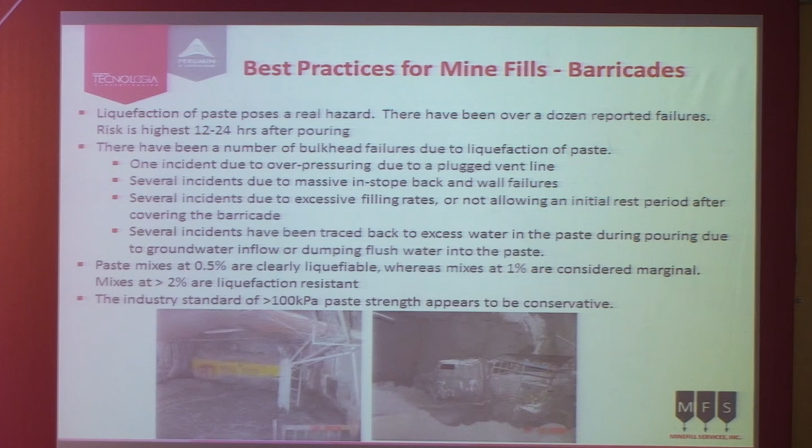And then of course with hydraulic fills, it all comes down to the water. Making sure that you don't have water in contact with the barricade by having an adequate drainage system, because the barricades are not designed for full hydrostatic head, and if you get that full hydrostatic head acting on a barricade, it's going to blow the barricade out. There have been a lot of incidents in Australia over the years where multiple people have been killed due to failures of barricades from overpressuring them. So we always recommend that you have rest times when you're pouring hydraulic fill in order to allow the water to drain out.

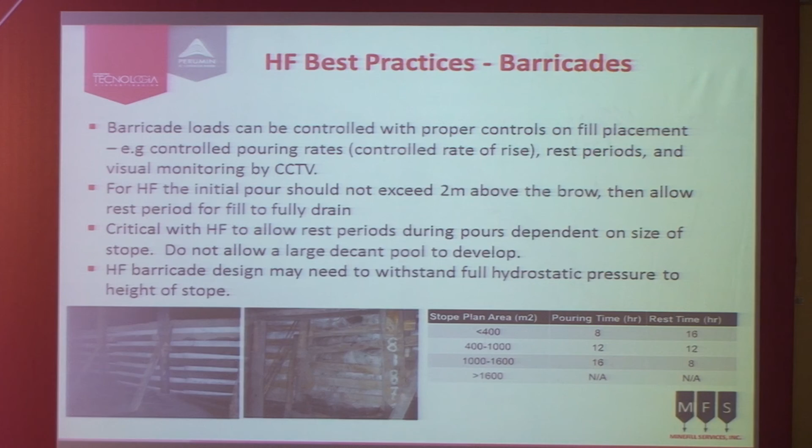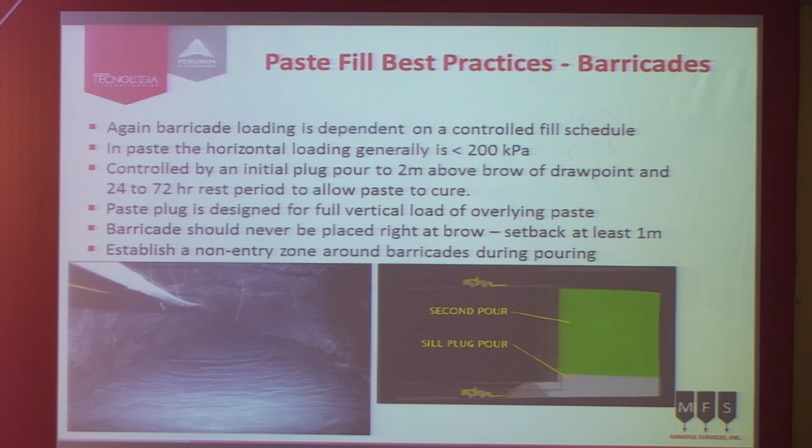And with paste, it comes down again to having that plug pour at the bottom to provide the safety, and then having a continuous pour on top. Making sure that the barricade is set back from the brow of the stope, and make sure that you have a non-entry zone behind that barricade while you're pouring.